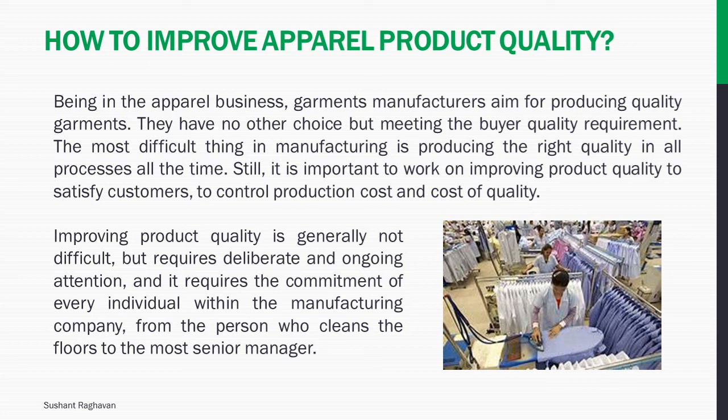Still, it is important to work on improving product quality to satisfy customers, to control production cost and cost of quality. Improving product quality is generally not difficult, but requires deliberate and ongoing attention. And it requires the commitment of every individual within the manufacturing company, from the person who cleans the floors to

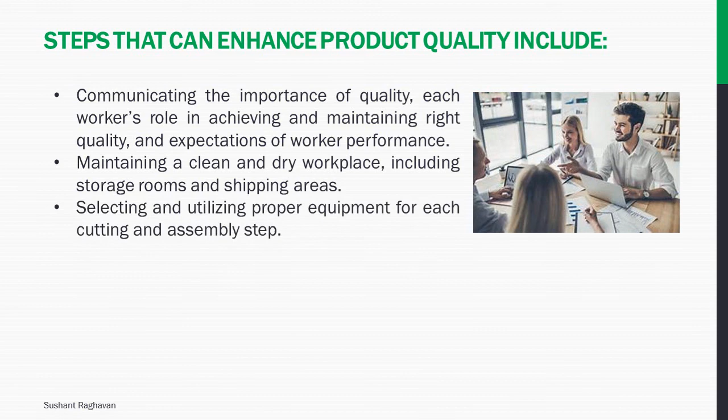the most senior manager. Steps that can enhance product quality include communicating the importance of quality, each worker's role in achieving and maintaining right quality, and expectations of worker performance. Maintaining a clean and dry workplace, including storage rooms and shipping areas. Selecting and utilizing proper equipment for each cutting and assembly step.

Providing the proper tools and training to each worker, and communicating management quality performance expectations. Planning and conducting an ongoing program of machine maintenance. Establishing agreed upon quality standards with all fabric and trim suppliers before purchase, including procedures for rejecting, returning unacceptable goods.

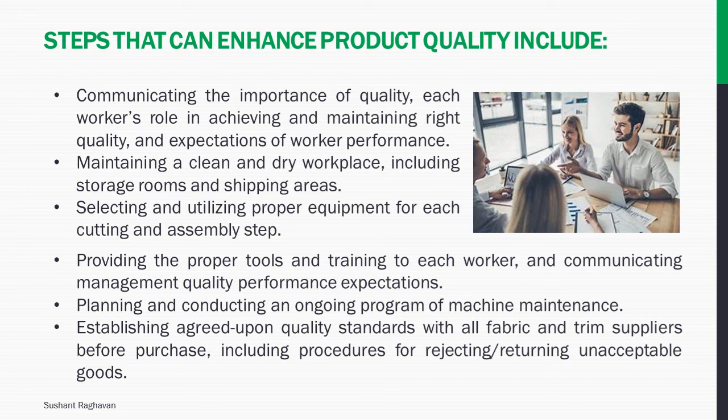100% inspection of all incoming fabrics to include at a minimum: visual inspection by a trained inspector running every roll of fabric over a backlit inspection frame to identify fabric defects such as holes, tears, stains, stop marks, and width variation, and to compare actual width and length to reported dimensions.

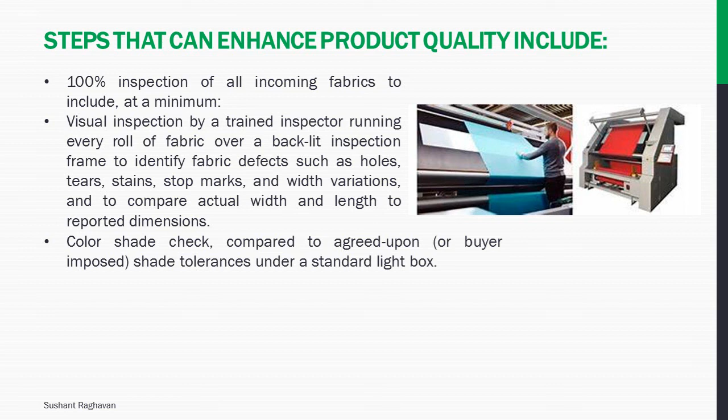Color shade check compared to agreed upon or buyer imposed shade tolerances under a standard light box. Rejection and return of all fabric not meeting agreed upon quality standards. 100% inspection of value added processes like panel printing, embroidery, etc. No defective panels or components should be sent to assembly. Defective component to be accepted after corrective measure.

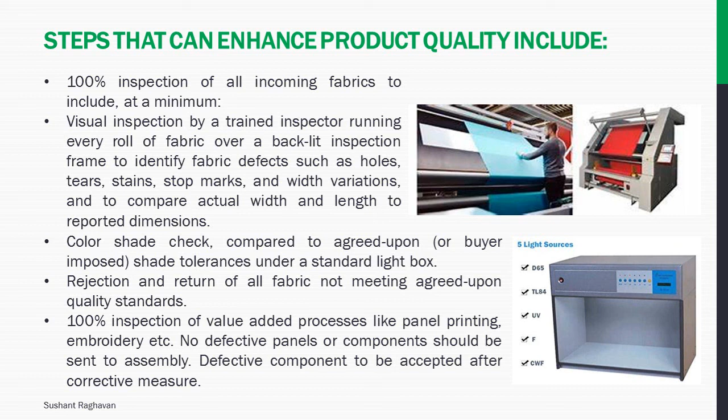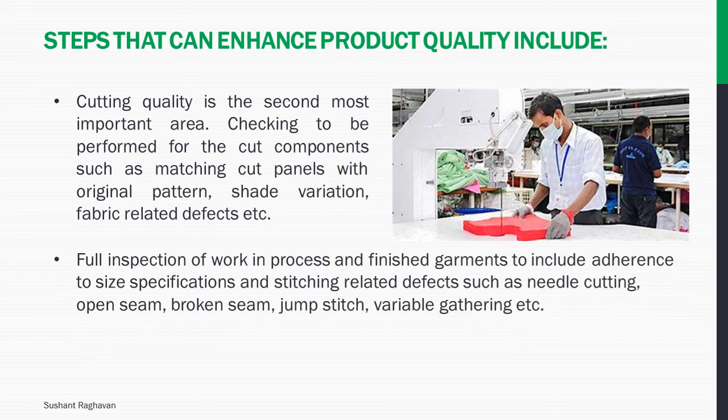Cutting quality is the second most important area. Checking to be performed for the cut components such as matching cut panels with original pattern, shade variation, fabric related defects, etc. Full inspection of work in process and finished garments to include adherence to size specifications and stitching related defects such as needle cutting, open seam, broken seam, jump stitch, variable gathering, etc.

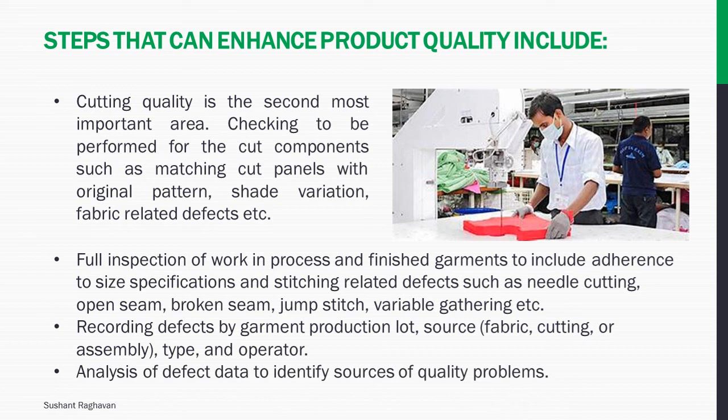Recording defects by garment production lot, source, fabric cutting or assembly, type and operator. Analysis of defect data to identify sources of quality problems. Managing repair work in garment production. In the garment manufacturing stage, getting defective garments is common while checking or inspecting an order.

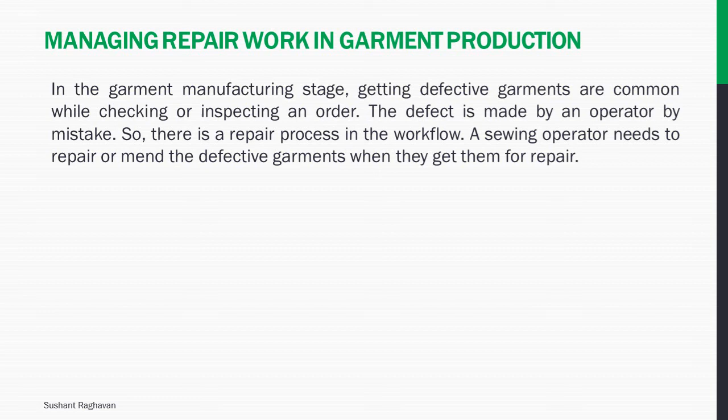The defect is made by an operator by mistake, so there is a repair process in the workflow. A sewing operator needs to repair or mend the defective garments when they get them for repair. Factory can check garments in the following stages. At the checkpoints inside the line, fixed workstation, checking garments prior to assembly section, checking garments at the end of each part completion, checking garments at the end of the sewing line, checking garments at the finishing stage.

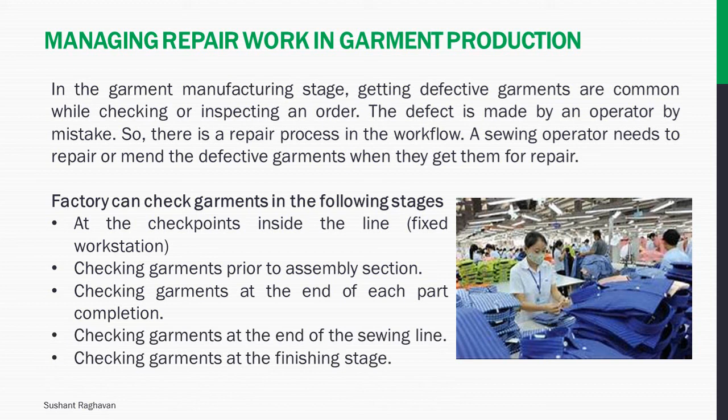Defective piece sent back to the operator for repair work. Collect all the defective garments and send for repair in a lot number of pieces after certain interval. Send piece by piece whenever a defective piece is found by a checker. Once you get a single defect, send for repair first instead of checking the whole garment. Rest of the parts checking will be done later and it will be followed in the cycle.

All stitching repairs can be done by a single operator for all the defective stitching. A defective garment is sent to the same line and to the same operator who stitched the garment first time for the specific operation. The repair can also be done by a different operator from the same sewing line as per the availability of the operators.

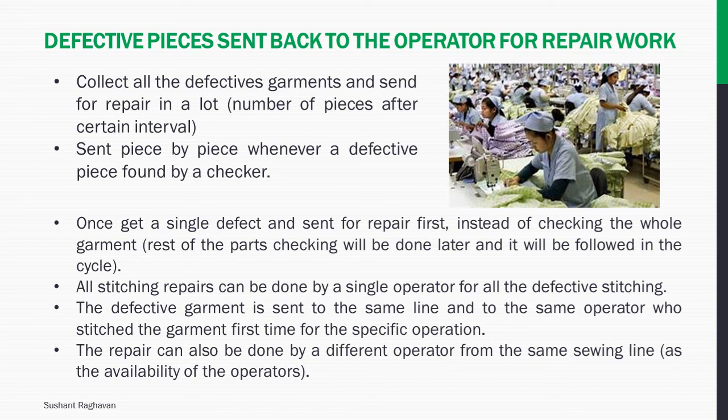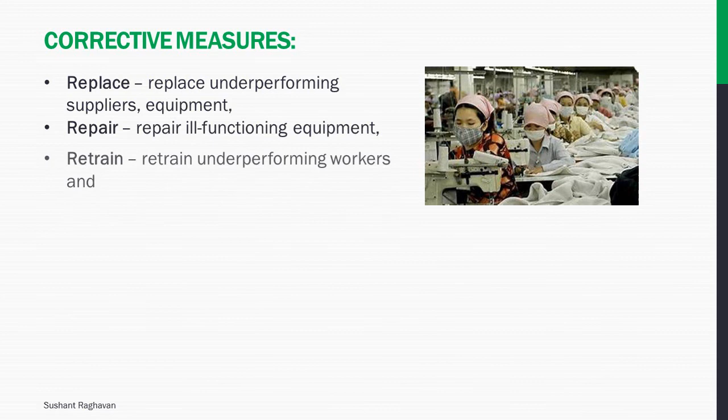Corrective measures. Replace underperforming suppliers, equipment. Repair ill-functioning equipment. Retrain underperforming workers, and reward high-performing workers. The above details are explained based on checking and repair work followed in production. You can make a matrix with this criteria and prepare an SOP for repair work in your factory.

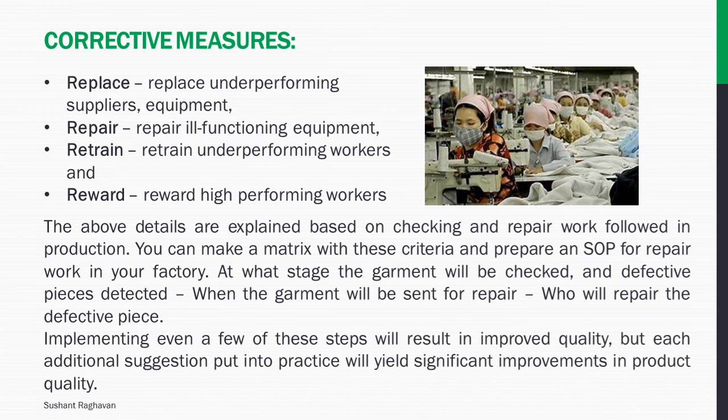At what stage the garment will be checked and defective pieces detected. When the garment will be sent for repair, who will repair the defective piece. Implementing even a few of these steps will result in improved quality, but each additional suggestion put into practice will yield significant improvements in product quality.